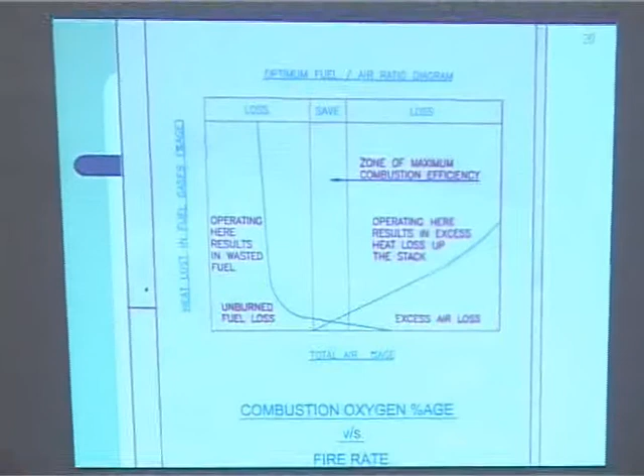Here, where the two graphs are intersecting, you should operate in that region, which is about 0.5 to 0.75% excess oxygen. This is where you should ideally aim to control your furnace.

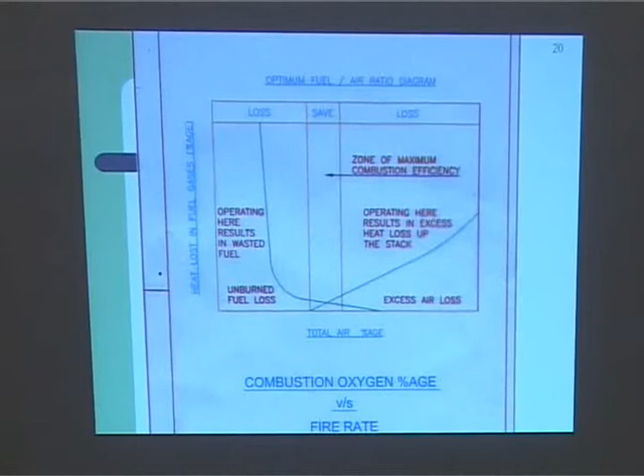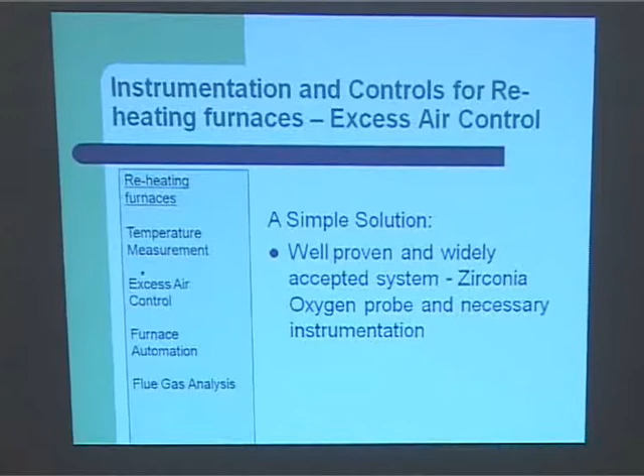A very simple solution is available in the world market, including the Indian market. The old days of Orsat apparatus and dew point meters are gone now, and you have got a very reliable tough soldier called the zirconia oxygen probe. The beauty of zirconia, zirconium dioxide, is that it is very faithful to only oxygen ions. It does not detect anything else in a room full of chlorine, bromine, iodine, fluorine, carbon dioxide, monoxide, and so on. You insert an oxygen probe, and it detects only the oxygen.

Rest of it is blind, something like a Hindi cinema style, 'Bhagavad Gita ki kasam kha ke sach bolunga, sach ke siwa kuch nahi bolunga' kind of thing. This oxygen probe talks only about oxygen and nothing else, and that reliability comes because it is totally solid state.

There is no moving apparatus. Gone are the old days when you would take a balloon and keep sucking the samples and send it to the laboratory to analyze it with pyrogallic acid or potassium hydroxide and so on. Those days are gone. I used to do it when I was a trainee.

This needs necessary instrumentation, of course. The probe is only a sensor. It generates signals, and those signals have to be processed and disclosed to you in terms of oxygen percentage.

These are the three factors which affect your combustion efficiency. One is temperature. When I talk of temperature, I mean not only the soaking zone, from where the billet or ingot is going out for rolling or forging, but even the heating zone and preheating zone, and excess air through the furnace. Scaling does not start only at the soaking zone, it starts from the preheating zone also, where the temperature is generally about 400-500 degrees.

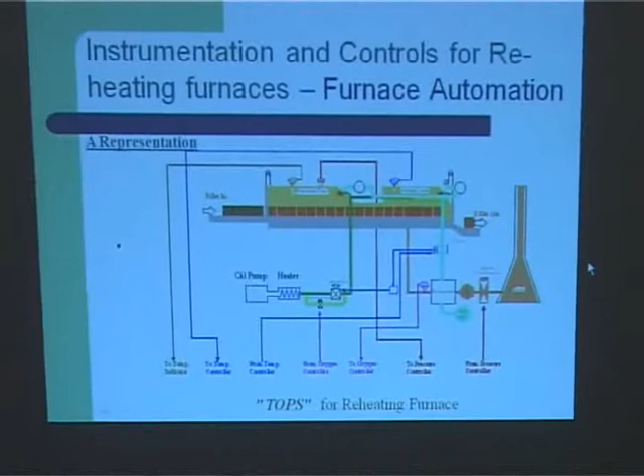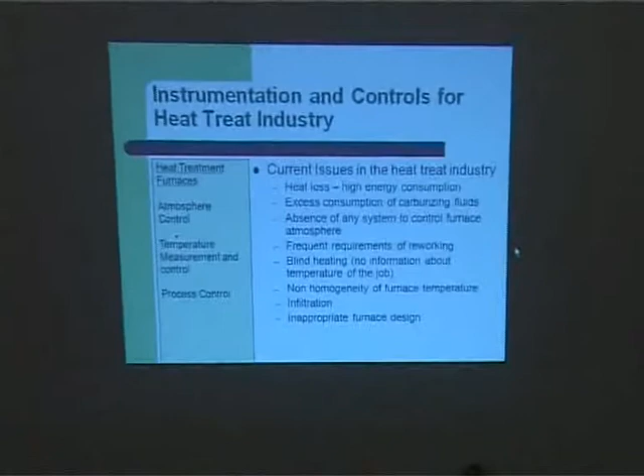This is, I think, to corroborate with what Professor Altekar was talking about, heat treatment. All these things are basically about blind heating, meaning your per capita energy consumption. If you are doing heat treatment of say 5 tons per day in a small furnace, 5-6 heats, whatever it is, it is causing you energy loss due to either overheating or prolonged heating, and excess consumption of carburizing fluid by not taking care of what you should have done when you put the charge into the furnace.

When you put the charge into the furnace, the temperature drops to probably about 200-300 degrees, and then again you are boosting it up. When boosting it up, some people wait till they reach that critical 925 degrees for carburizing. Why don't you start admitting the fluids much earlier, so that you can maintain the furnace atmosphere definitely reducing, so that there is no loss of surface carbon, which is your main critical quality assurance factor.

Apart from controlling the consumption of carburizing fluid, you need some system to control the furnace atmosphere. As the professor was saying, how much carbon you are permitting to penetrate depends on the furnace potential being high enough; depending upon the absorption of carbon into your steel casting or whatever it is, otherwise the carbon will not penetrate.

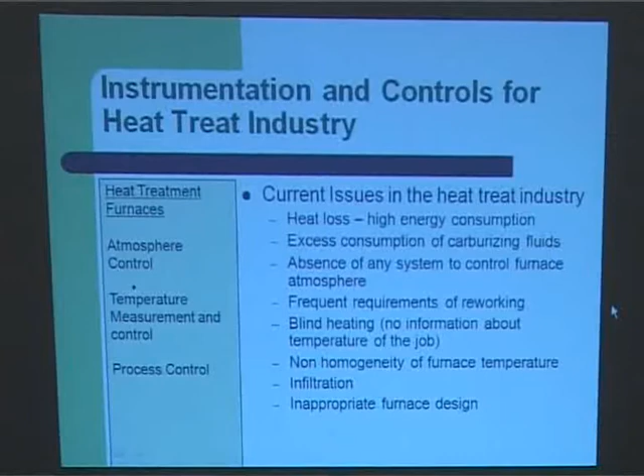These are mostly operating parameters which I am sure all of you know.

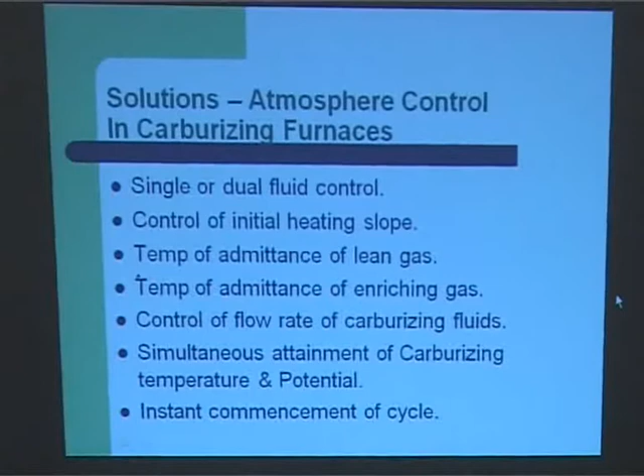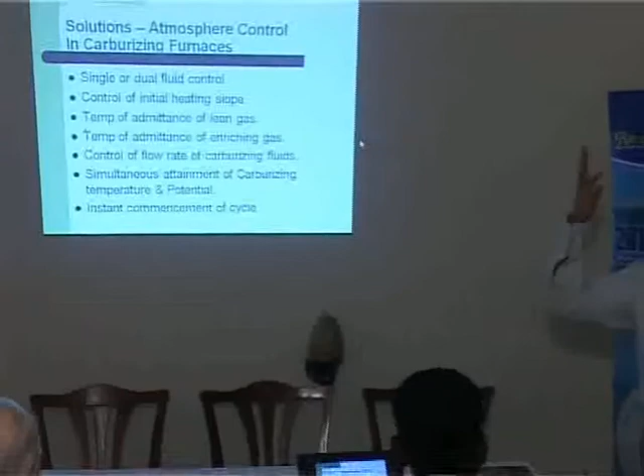The third bullet is what I was talking about: temperature of admittance of lean gas. If you start admitting your gas there, maybe acetone or LPG or whatever you are using, at a lower temperature, in small quantity - I am not asking you to consume gallons of it - the basic idea is that the entire furnace atmosphere becomes reducing, so there is no loss of carbon from the job. Therefore, when it comes to the ultimate carburizing temperature, the additional boost or dosage of carbon you require is very, very nominal. And therefore you are able to achieve your case depth and case carbon in a much shorter time. Instead of say a 5-hour cycle, you may be able to achieve it in 4 or 4.5 hours.

This is a typical cycle, all of you I think know it, I need not elaborate. Only thing I try to show is what a multiple segment looks like, and if you see the initial stages, there are two dotted curves and one red line curve. The red line curve is the ideal heating slope, and the dotted ones show either very slow heating, meaning your heating element capacity is not okay, or the other extreme where heating elements are too powerful.

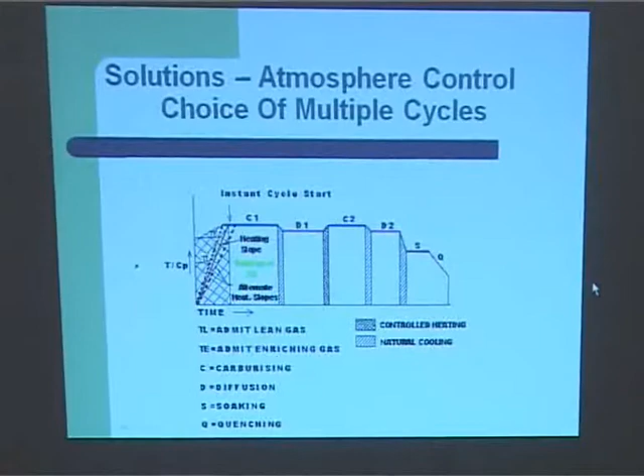Too powerful means you are pushing the furnace, and at that stage you are consuming a lot of electricity, and the current loading of the heating element goes very high, therefore the life of the heating elements gets shortened. Super Kanthal, A1, etc. - whatever heating element you use - if you are forcing the furnace, the heating element life gets reduced, and if you are heating it very slowly, your productivity suffers. And you have got multiple segments: carburizing 1, diffusion 1, carburizing 2, diffusion 2, soaking, and so on.

Somebody thought of animation here.

This is for those of you who are getting bored with my talk.

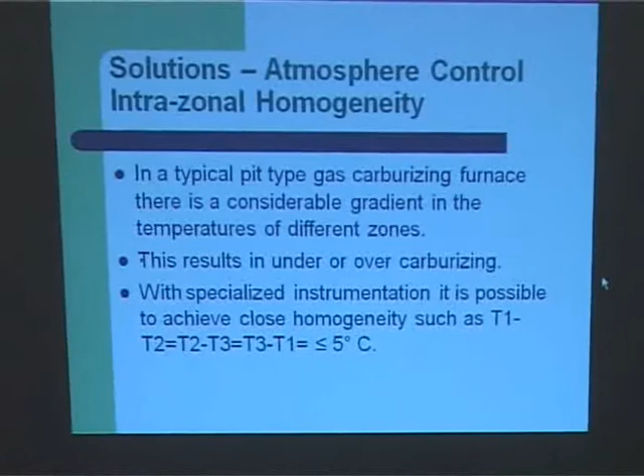This is what I was talking about: a typical 3-zone temperature control, top, middle and bottom. How do you regulate this so that all of them are within a narrow band, say T1 minus T2 equals T2 minus T3 equals T3 minus T1, equal to or less than 5 degrees? That kind of achievement is possible with proper sensors and proper controllers. This is called intrazonal homogeneity - homogeneity of temperature - because the carburizing atmosphere diffuses because of the fan there, but heat, because of convection, does not really travel that much. And at this temperature, about 920 degrees, bulk of the heat is by radiation, don't forget that.